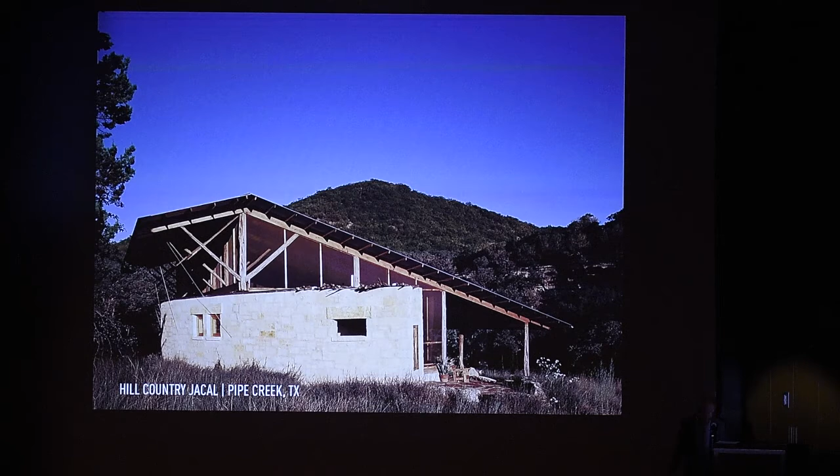And this is kind of a walkthrough of porches. I think porches are these beautiful man-made elements where you're out of doors. They're this fragile ecosystem that we make, a boundary between nature and the man-made.

Most recently, this beautiful house that Ted designed on Marble Falls. And then we started doing arboretums, buildings of the landscape in Naples and other places, each responding to sun and shade. And most recently, in Big Bend, this beautiful rusty thing that houses that beast, a dinosaur.

And this is the Quetzalcoatl, our original pterodactyl, native to Texas — kind of like the Dean, but the Dean's prettier.

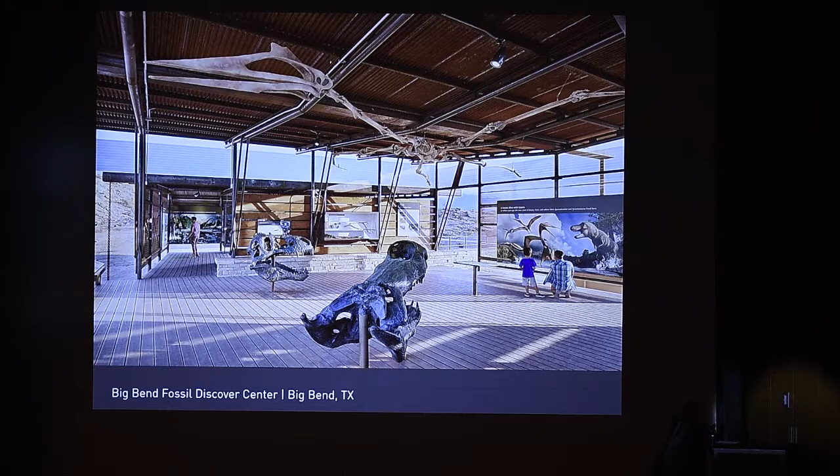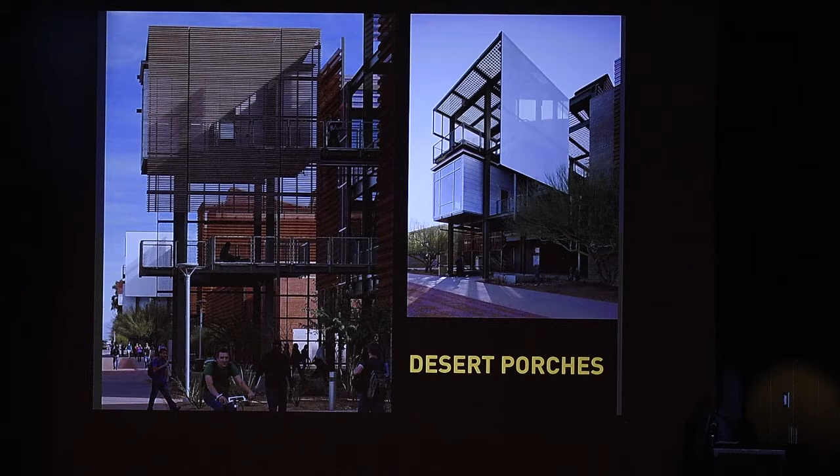Yeah, it's all open air, superstructure, all about being light on the land. This is ASU's campus, which we were lucky enough to work with Christy on, more PV array porches, getting a bit bigger scale, all porches.

Come on, that was pretty funny. My wife says I'm not supposed to say that. I'm supposed to laugh at all my jokes.

I'm going to start with a project in San Antonio on the river called Confluence Park. Bob Harris, my partner, and Tina Florian were the lead designers on this amazing job. This was about creating a visitor center on the San Antonio River that was all about engaging the place and talking about how water can be preserved.

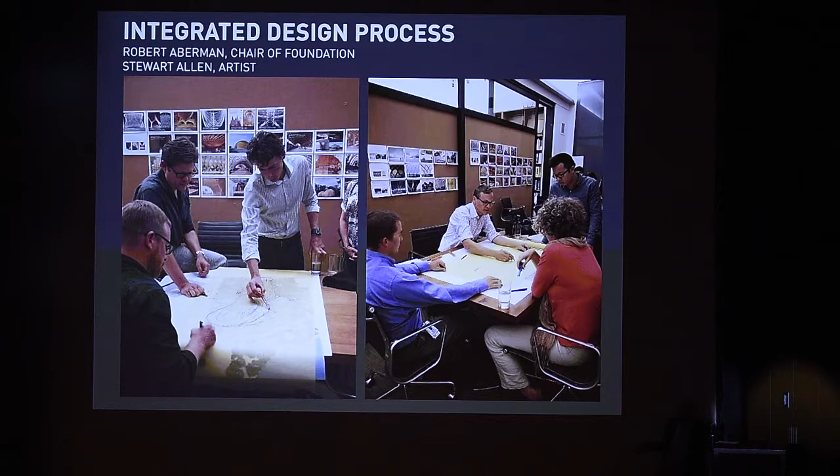We started, as we always do, with an integrated design charrette and made very significant aspirations about how the building should perform, how the owners, users, and visitors should engage the building. We begin this without any thought about what the building should look like. It's more about performance criteria.

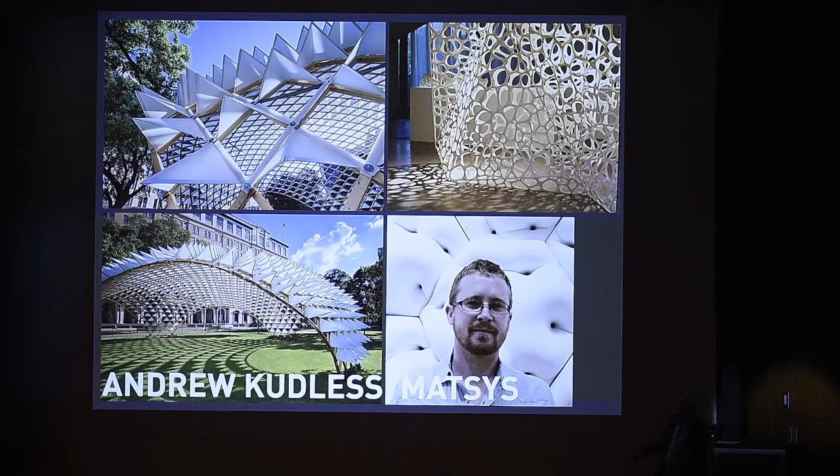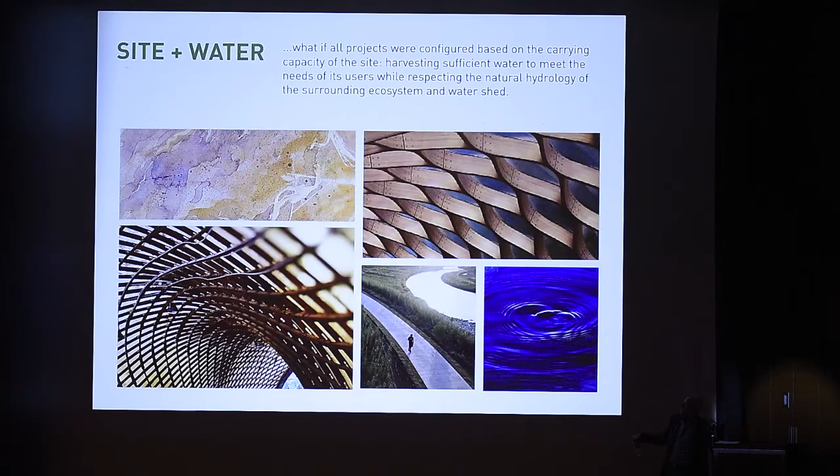We also had some amazing collaborations with Andrew Kudless, in this case with Matsys. We brought him in as kind of an artist, sculptor. He's an architect. He does these beautiful shaped forms, and he led us in a path we would never have gone in. Part of our journey when working with all these great consultants is to go on paths you can't anticipate. So, site, water, how does water shape the building?

This lovely idea about water and the umbrella, cascading off versus a funnel on the upper right. We decided to go with a funnel shape. Singing in the rain, toroidal shapes led to the first design, which is a steel structure as a tent with wood.

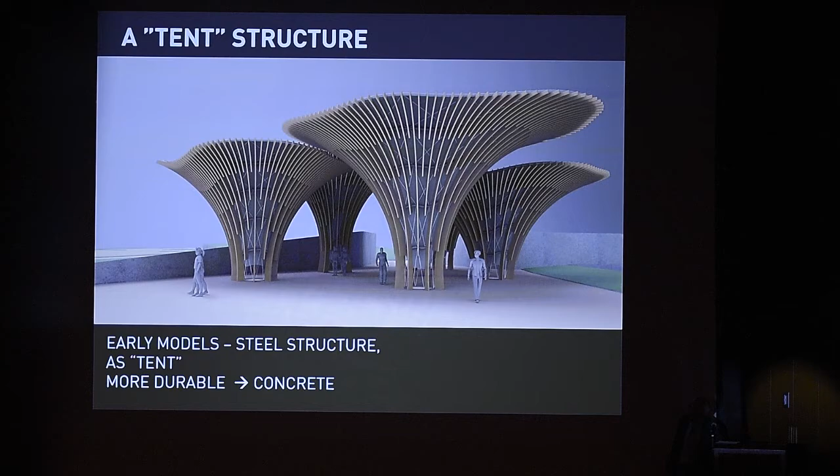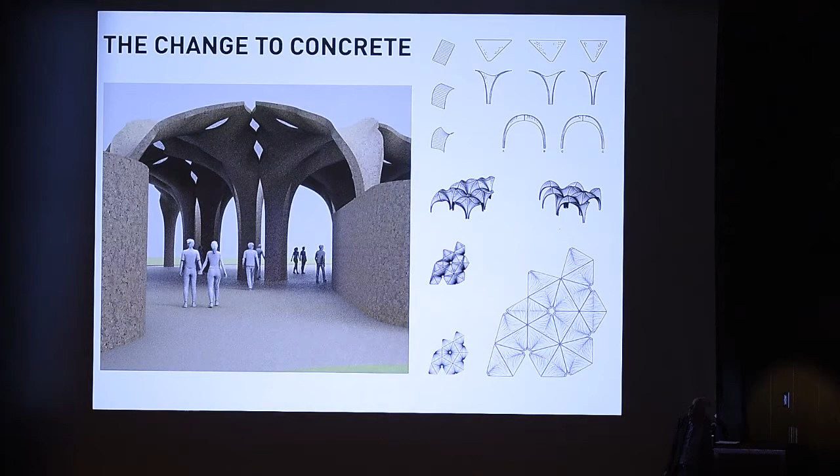We did a bunch of analysis. We found that we could do this more durably with concrete, longer lasting, and we began looking at shaping this. These are all forms being replicated. There's only 2 different forms, replicated in shape.

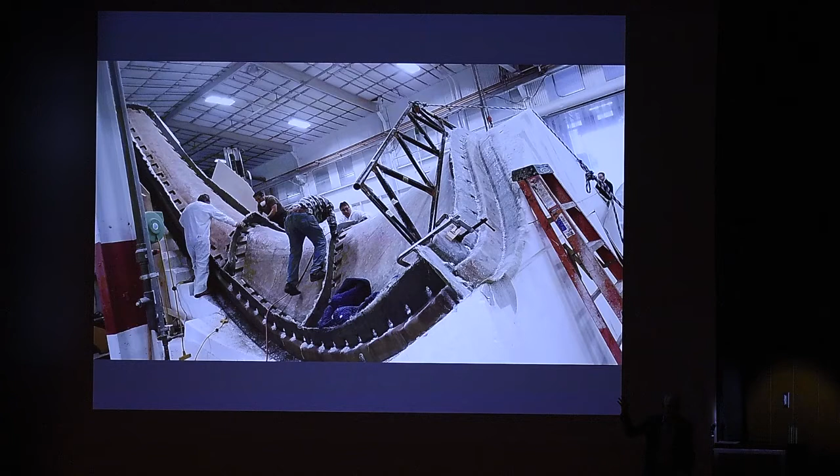So that was all shaped by a router, routed with a computer. The computer spit out this shape. The shape was fiberglass, and into that fiberglass shape were these concrete forms that then end up getting erected on site.

And that's kind of the wonderful character of the concrete, very rustic. It is what it is, and let it be what it is. Now the petals are going up as we speak.

So you can see how the funnel shape, the water cascades from the front down, and these are collection points. Each of the legs goes into a cistern. It keeps every bit of water that falls on the site in the site.

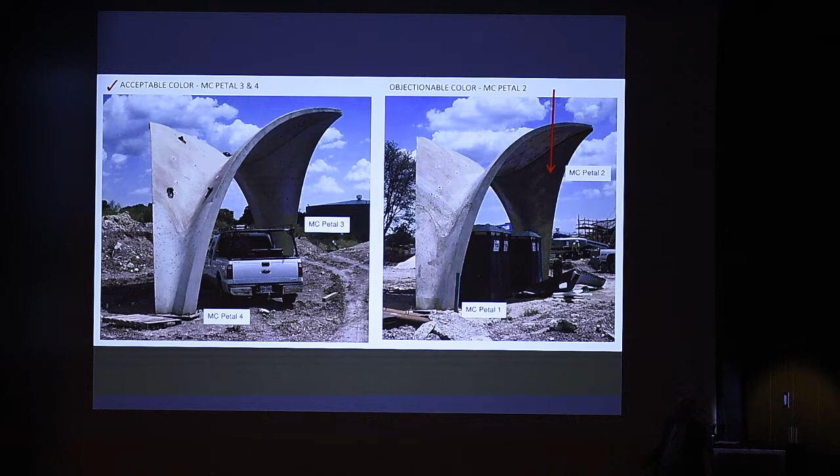Every toilet is flushed with water. All the showers for bicyclists are flushed with rainwater. All the irrigation is done with rainwater. There is no rainwater brought from off the site. It's effectively a net zero water project.

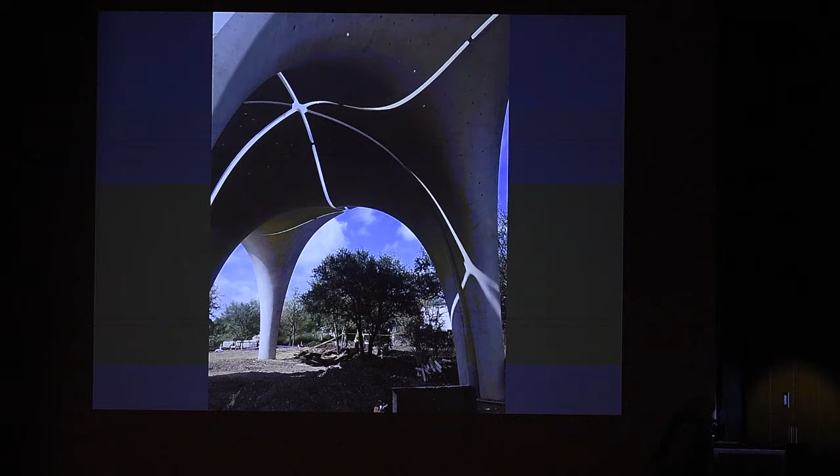Here's the form going up with the holes in the forms for daylight to stream through. And then there it is erected. It should be finished in 4 months, and that's what it's supposed to look like.

And this is what it's like when it's raining. So Confluence Park is really shaped by water. It began as a water element. It was all about how we worked with biohabitats, a lot of different designers, to craft a special rainwater harvesting porch.

The Witte Museum, we've been working with the Witte Museum for 25 years. It's our longest client, I guess they are the most patient. 25 years is a long time. We've done 7 different master plans, but we started with Brackenridge Park, and if you ever go to San Antonio, you need to go to the Sunken Gardens and see these incredible WPA projects that continue to inspire us for their craft and their beauty of just regional materials.

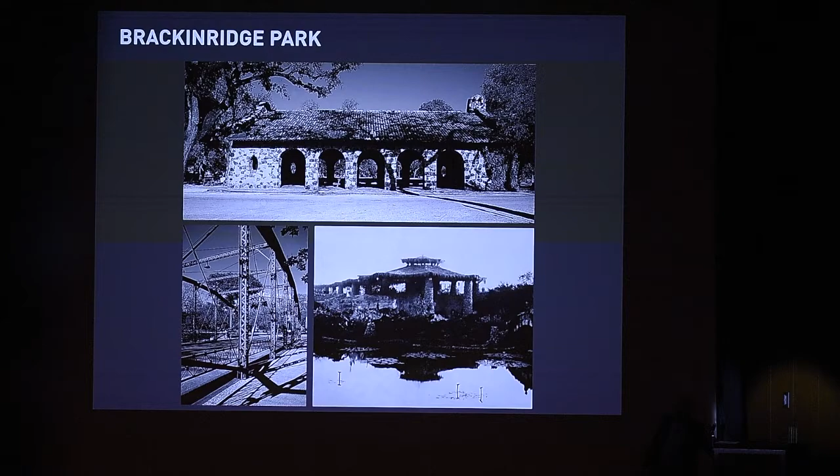That inspired us to integrate, this is the 4th generation concrete sculptor, and there he is sculpting on the left, and this is the entranceway into the new Witte for the children's entry garden.

WPA is evident all over the site. So when we were starting this fourth phase of the Witte, we were working with Gallagher and Associates, a really fine exhibit designer in DC and New York, and we decided the building should be part of the exhibits, and the building should speak to history and to place and to experience.

So we said, well, we think dinosaurs should romp all over the facade. These are actual dinosaur footprints that were cast by the paleontologist, sand cast, and then we cast them into concrete, and you can see the shape, the size, the scale of that dinosaur footprint. This happens to be a T-Rex footprint, and then you can see the byproduct of it in the stone itself.

And yet, oh my gosh, another porch. This is actually a lab for junior high kids to engage with environment and to do all kinds of science exhibits. There is a tree coming out of that porch, a cypress, actually. If you go back, that trunk right there on the left is a 180-year-old cypress tree.

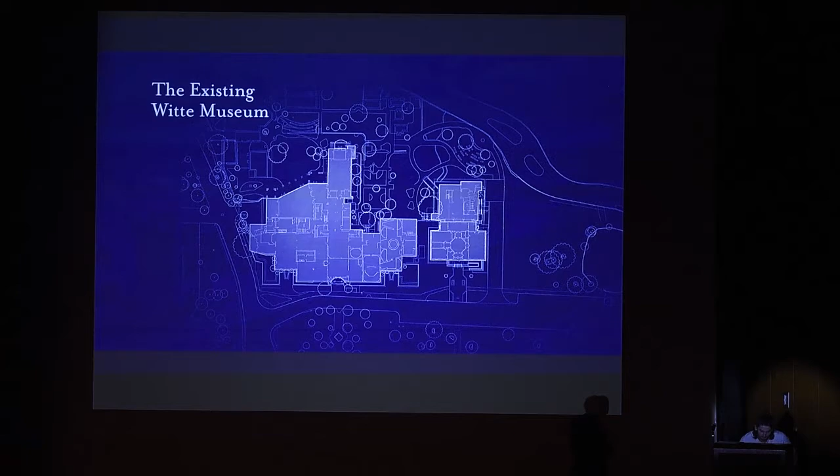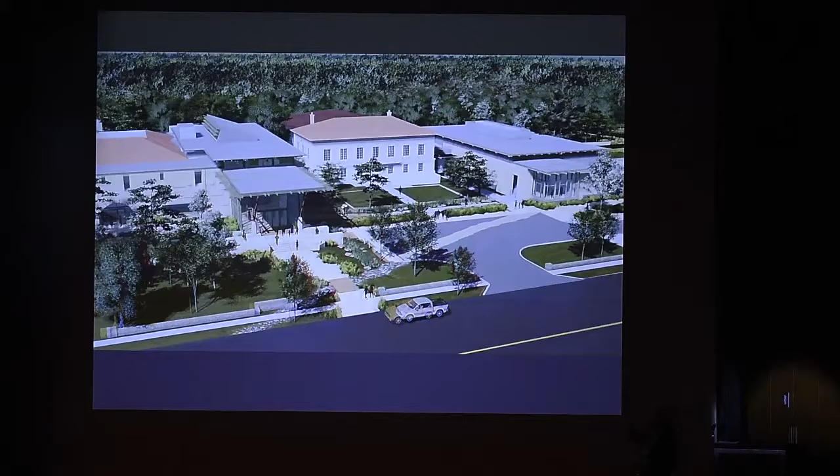So this is actually going to take you on a journey. This is an early video that we showed the Witte, and you're flying over the building. This is the new Witte in the middle. That's the old Pioneer building with the red tile roof. You're flying over the event center on the right. There's the entrance with the school buses for the school kids, and on the far right, the San Antonio River.

This is before, and that's after. That is the image of the building. We've got water cascading on the left. The building, the walls itself are out of old yellow limestone, so the building talks about weathered stone, brick, the history of building materials.

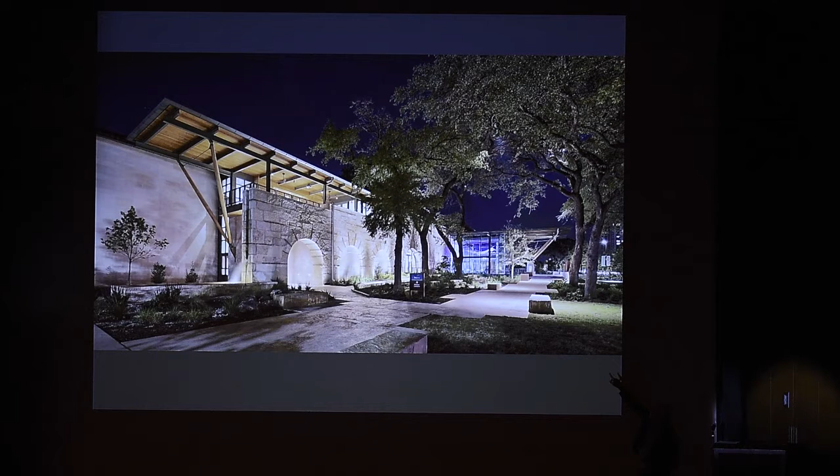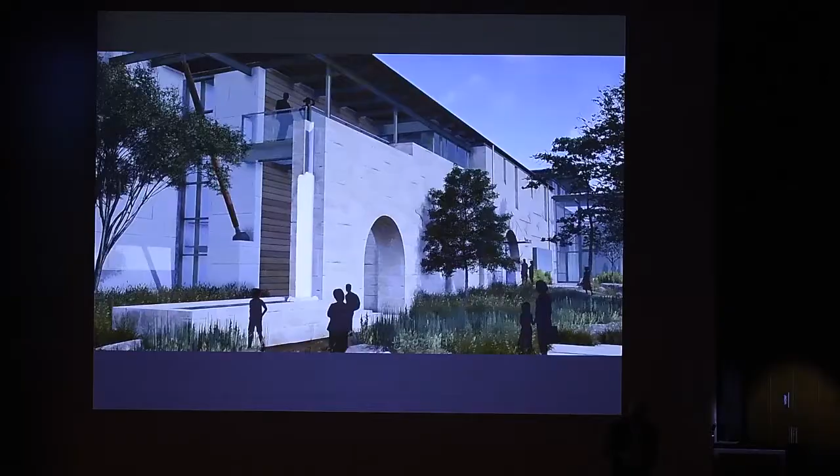Another image showing the very front door on the right, and you can see the flying pterodactyl in the middle. So this is Discovery Walk. So as you're moving up from the garage to the front door, you're discovering history, deep Texas time, and off we go.

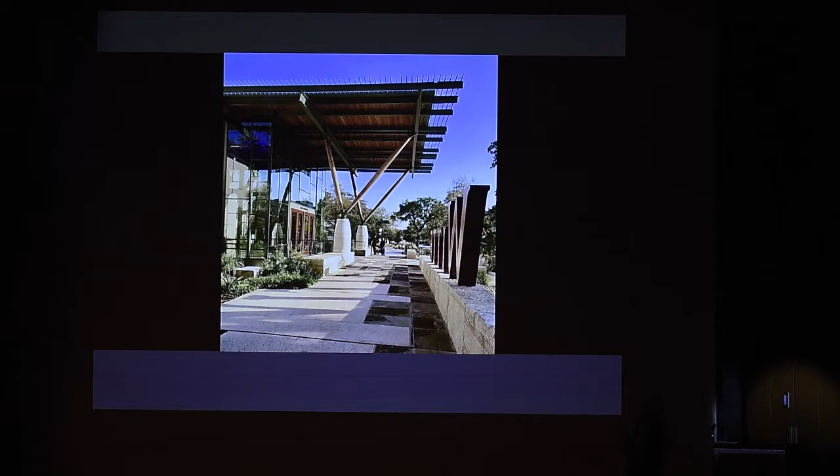So we often use these tools to especially talk to specific issues about experience. That's the front door portal. You gotta like movies, because I don't have to say anything.

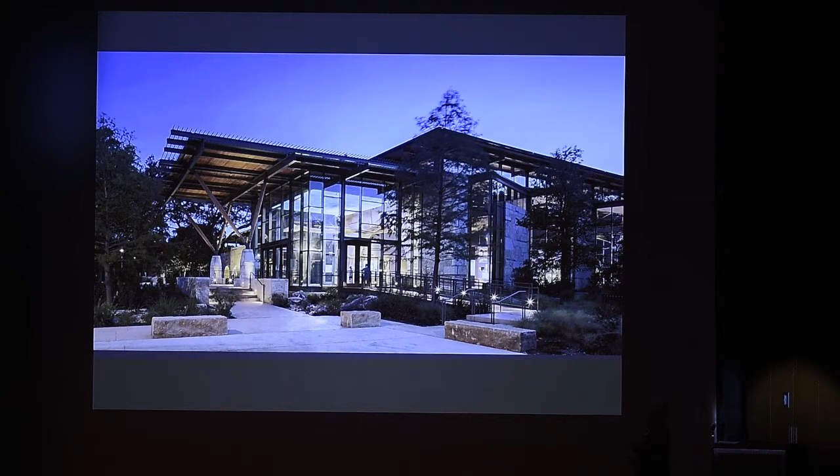This is a rain garden. Every bit of water that falls on the Witte cascades and is caught by bioswales before it goes back into the river. There are the pterodactyls overhead.

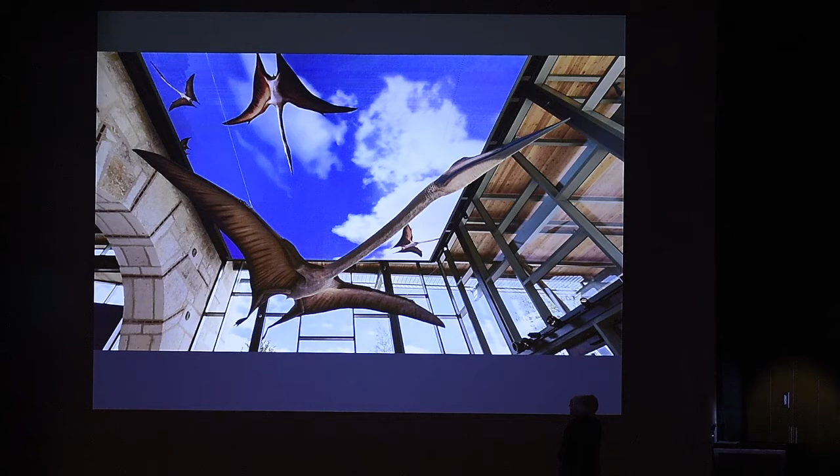The archway, you come into the building through a great arch. The old Witte had three Romanesque arches, so we thought, well, we'll just do one big 26-foot arch. And there's the pterodactyl with the video above it. So the front door is actually, as you're waiting for your ticket, you're flying with the Quetzalcoatlus.

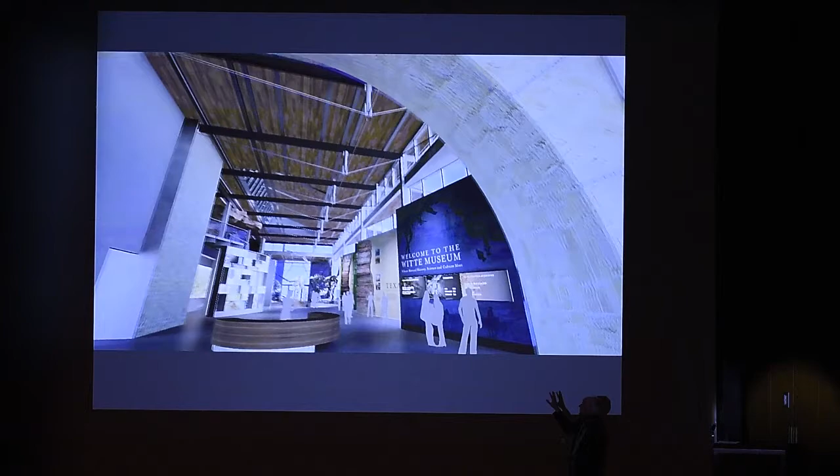As you go through the arch, you go into deep Texas time on the right. We always love road cuts because they talk about the history of the orogeny of Texas and the thousands of years, hundreds of years, millions of years, and that becomes the wall panels that are the exhibit of the building. And as you move around, you're looking towards the backyard, towards the river.

And the dinosaur exhibit is toward the rear. Lots of light. Unlike other museums, the great thing about working with a science museum is it's not light sensitive. All the fossils are actually cast polymer fossils, so they can take lots of light.

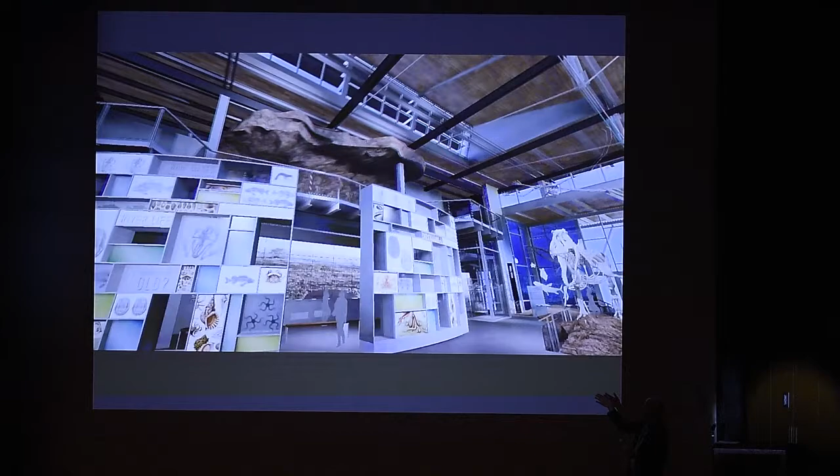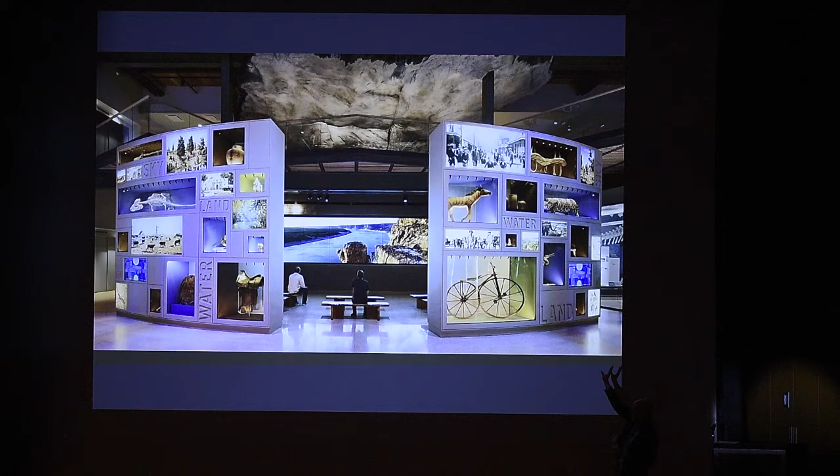Now we're rotating and looking into the orientation theater in the lower half. Up above is actually the Pecos sandstone overhang. So you understand kind of deep Texas time orientation of the entire museum, and eventually we'll move up to that limestone grotto above us. So it's a way of thinking about working with Gallagher and Associates and having the exhibit be integral to the building experience.

So now we're in the Dino Hall. As we move out to the backyard, the glass, which faces southwest, is actually coated with imagery, knocks down the sun. We rotate back around and look back towards the Great Arch, and that's the finished project.

There's lots of technology embedded throughout these elements.

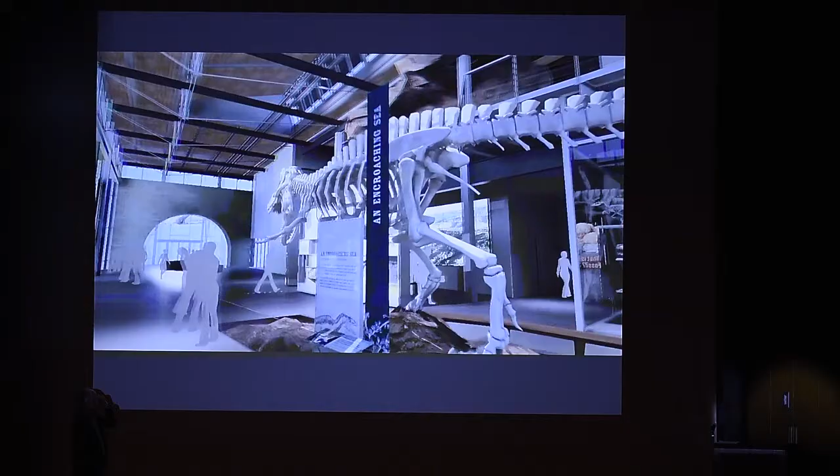And we do have an encroaching sea, no question. Looking back towards the backyard and the river.

And then at night, so a very different character at night, with lots of interesting theatrical lighting we had to achieve during the day versus the night.

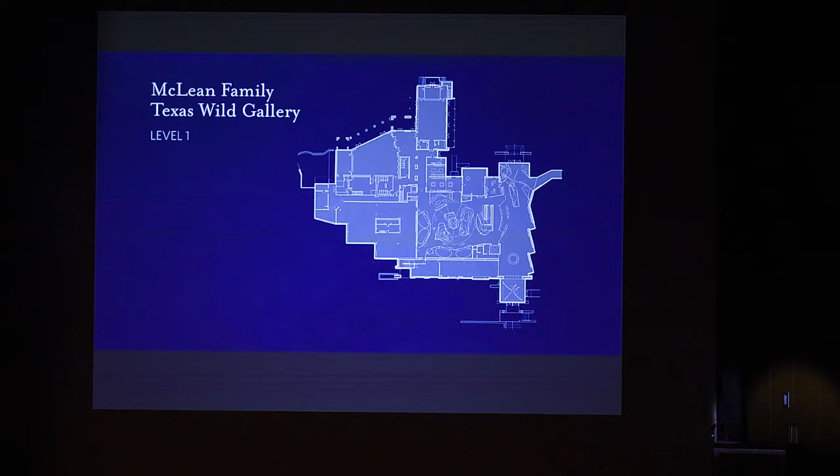So the Texas Wild Gallery is the old part of the museum that we had to repurpose with dioramas. You move through the old dioramas that have been restored, past the bison, and look up to the Texas sky, which is changing, and there's a thunderstorm that happens.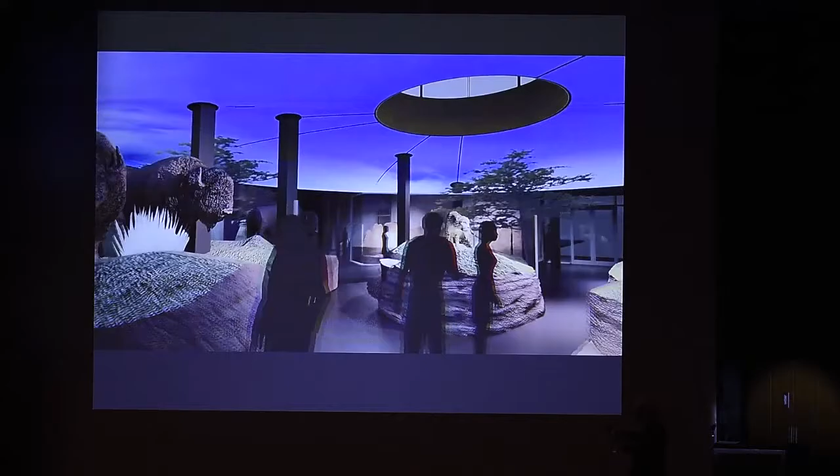And how also to make a lot of these exhibits so you don't feel roped off. You feel encouraged to engage the tactile nature of the exhibits.

And then you can see the water on the left and the croc. And then we're going to go upstairs to the rock shelter overhang of the Pecos.

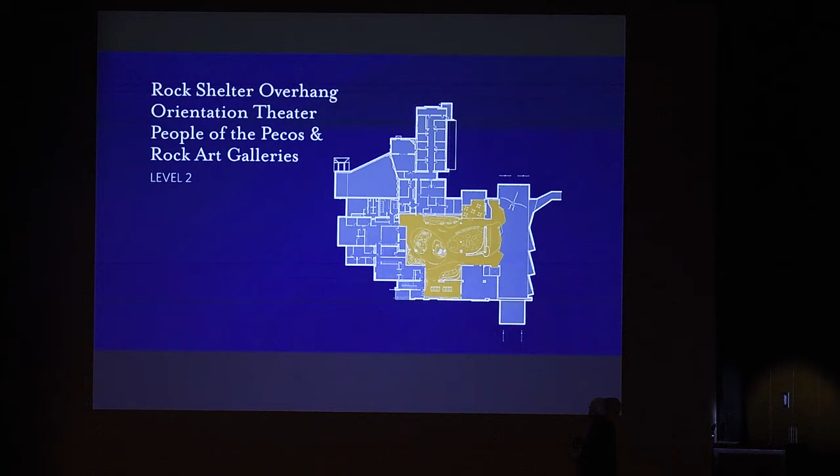So the Pecos culture in far west Texas, you go past the overhang, the entrance is to the left, and you go into the orientation theater for Pecos.

So the Pecos culture, these incredible pictographs are 8,000 years old.

They're actually, the Witte Museum is the major entity that takes care of the entire Pecos culture in terms of all the rock shelters.

So we worked with these incredible fabricators from San Diego who built all this faux limestone rock and gravel, converting a very mundane second floor experience into this very hands-on interactive, both technologically as well as visually interactive space.

All the pictographs are actually projected onto the fabric of the stone, and so you can rotate through the different major caves of the Pecos culture.

And that's actually a photograph, not a rendering.

So from the overhang, you're looking out to the river, past the Quetzalcoatlus and the exhibits. The sun slides through the space, and you're looking towards the arch on the front door of the great opening.

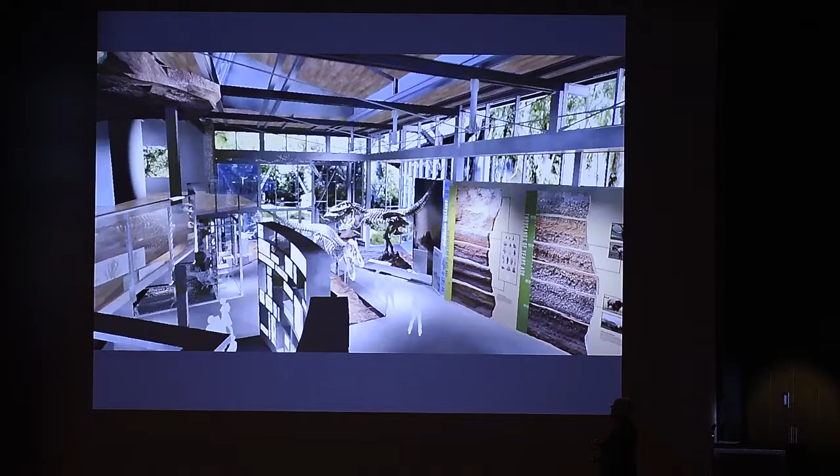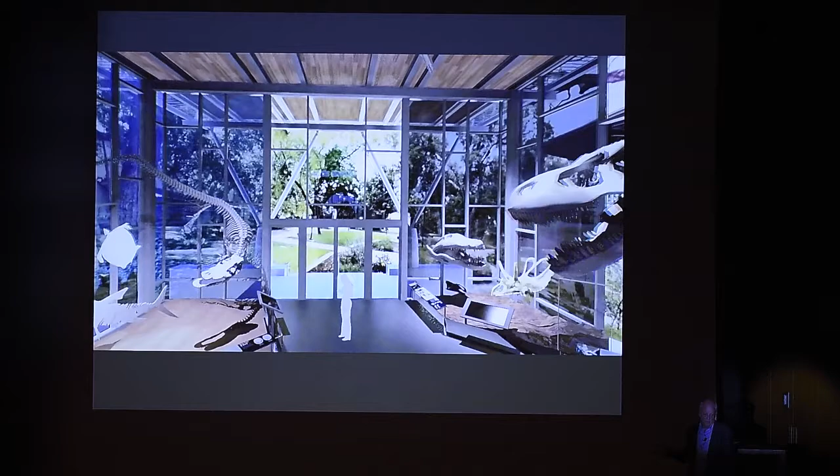And then we go back down again. So this was really helpful to the Witte, to be able to show how the building engaged exhibits, how exhibits were intrinsically part of the experience, and how they could fundraise for the building. They had to raise over $100 million, which is not an easy task in San Antonio, Texas.

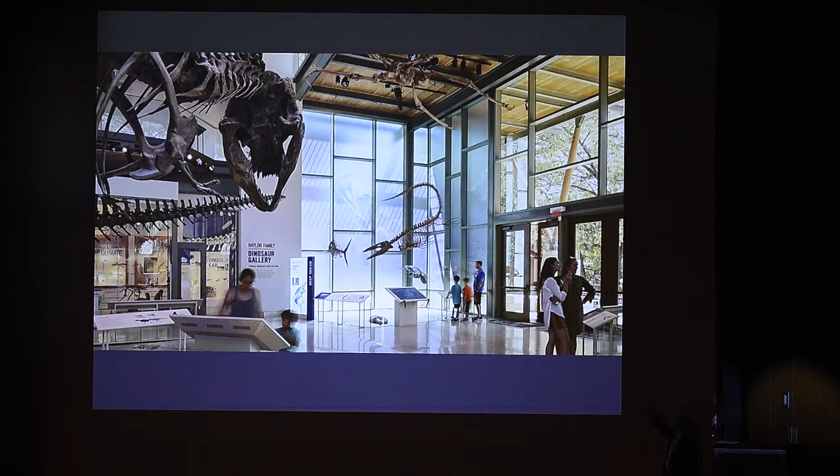And there's another before, looking through the windows, showing how the windows become the exhibits. And the one I really love is the next one, which shows the deep forest green of the Cretaceous area when you're looking out towards the river, but you're engaged with these exhibits.

So this tool was really helpful to the museum, not only for fundraising, but for the exhibits, staff, and curators to really understand how the project worked.

So the next building is the third building, and then after that, we'll do a quick urban design segment. But the library just opened.

It's been a journey, like every project. It's involved quite a few consultants, and we always imagined the library as a portal not only to knowledge, but also to the environment, and that the two were intrinsically linked.

And having grown up in Austin, as a citizen, we've never had our own living room. We've never had our own kind of public space to call our own, to be engaged in landscape and also engaged in a man-made environment that was very much sympathetic to the landscape.

So I'm tired of talking. So Jonathan...

Smith is going to come up here and walk through. So Jonathan's an associate partner. How many years did you work on this project?

I've been working on the library for roughly the last 11,000 hours of my career. So longer than I was, not that I'm counting. Okay, with that, I'm sitting down. Longer than I was sitting in the seats here getting my B.Arch from UT.

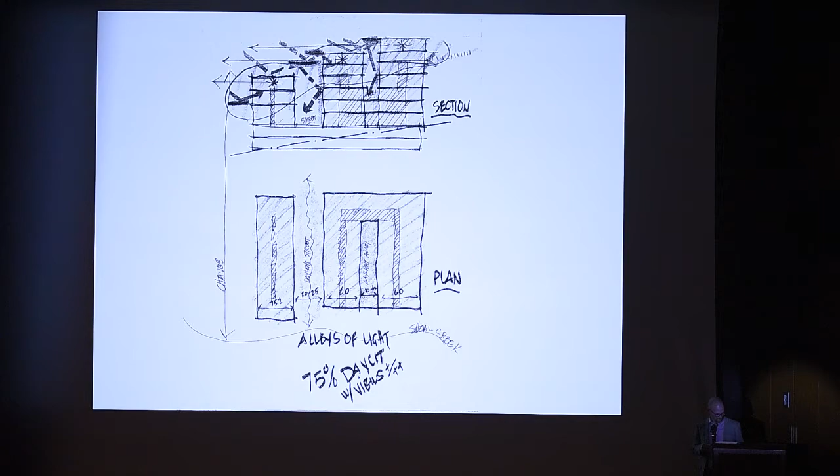We did this in two ways, analog and digital. One of the most helpful things we did on the entire job, and you're going to see a theme of workshops, was another 2-day workshop with all the stakeholders who could impact the daylighting: the daylighting designer, the artificial lighting designer, the interiors, and the architects. We were joint ventured with Shepley Bulfinch on this project. So for all you students out there, here's a quick how-to so you can go home tonight and do your own daylighting workshop or charrette with your daylighting designers.

Step one is build a 1/4-inch scale model of your space. In our space it was an atrium, 6 floors, so it's a fairly large model. We called it a dollhouse model because the colors on all the walls and different spaces within the building need to be fairly accurate. You can't build it out of black foam core and have it perform the same.

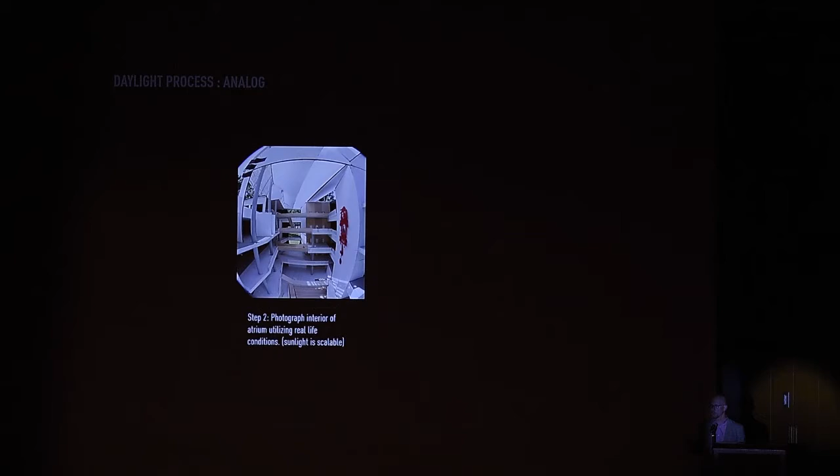Next, you choose a vantage point within the model and start taking photos. We used this not only as a daylighting tool but also as a really important design tool. This moved the bridges and the stairs around within the atrium just by using that model.

Step 3 is getting a fancy luminance mapping so you can really understand where the daylighting is coming from. Here you can see that sort of lightsaber thing in the middle -- there is our central skylight that's doing the bulk of the work here.

Step 4, like anything in design, is iterating over again. Gus there on the left in the blue shirt and I spent a large portion of the night between the 2 days of the daylighting workshop rebuilding a different roof for the building and testing it out the next day. We learned a lot from that -- just a few quick things that made it through that we wouldn't have known about had we not had that daylighting workshop.

One was basically the guardrails around the atrium and how hugely important those were to daylighting. We originally had those as clear glass and they got changed to an opaque white. The other big one is on the north side of the atrium, there are 2 large south-facing walls. We had thought originally those walls might end up being green walls, but when we put our little piece of green felt in the daylighting model, it sucked out almost all the light. So they ended up being these really bright white panels to really harvest the daylight in the space.

Along with the analog was also the digital. We worked really closely with the Integrated Design Lab out of Seattle. They were our daylighting consultants, and we ran through all the paces in digital models as well, trying to tune and hone and work through different options.

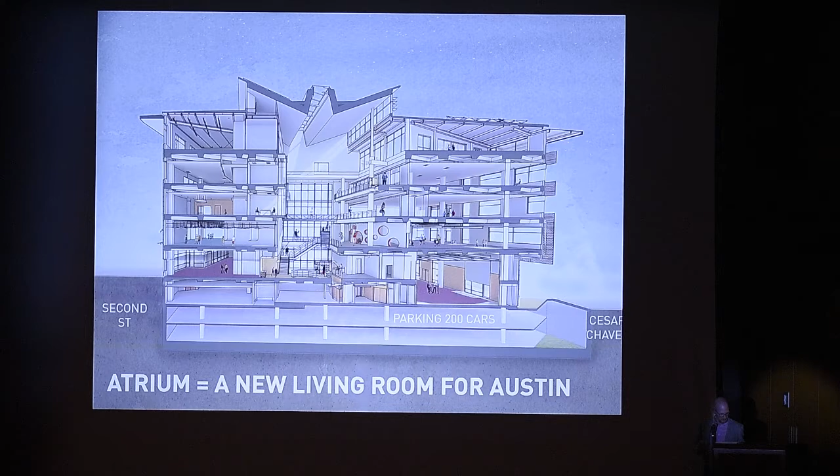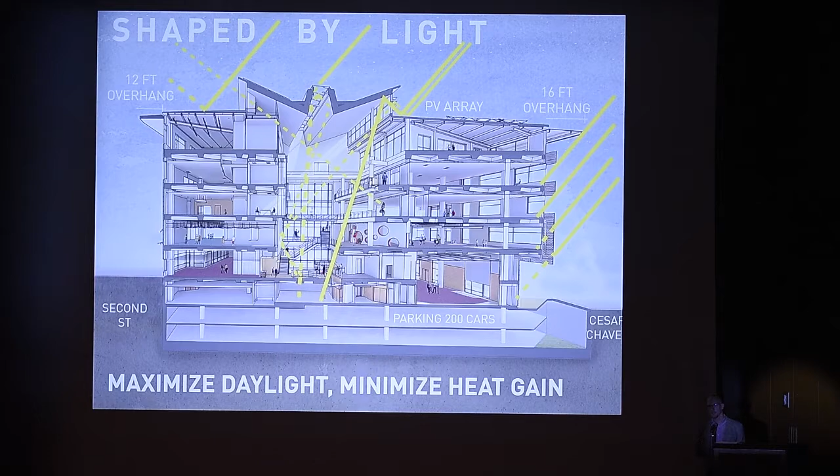So if you went to the library this past weekend, here's what it looks like with the atrium there in the middle. You can get a rough sense here about how we were using that center space to really bounce light around and off of those guardrails I was mentioning, and bring it into the space. So as well as the 5th facade on the roof, the other 4 facades were super important as well.

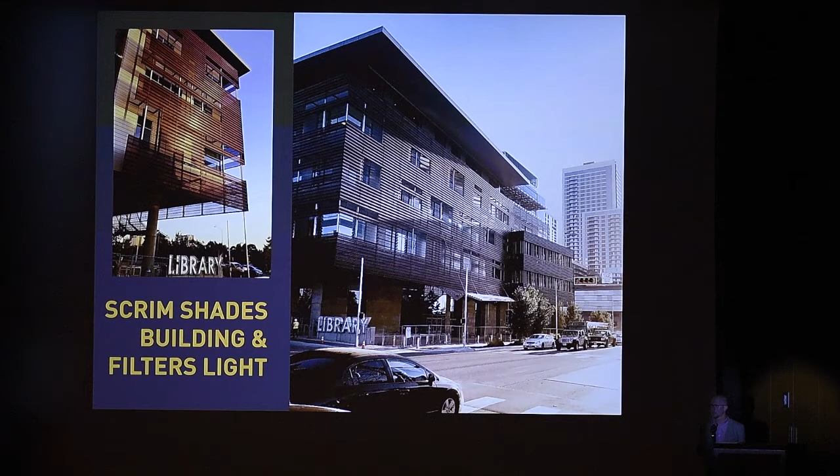We really wanted to fine-tune those to continue to make this the best daylit library in the country. We did that in a similar fashion, where everything from the floor-to-floor height to the aspect ratio, the sill height, the scrim, the perforation, and the color of the scrim was studied and worked through. We ended up with a 50% opacity on those screens on the exterior of the building to shade the glass and the exterior, but also bring in enough daylight for everybody.

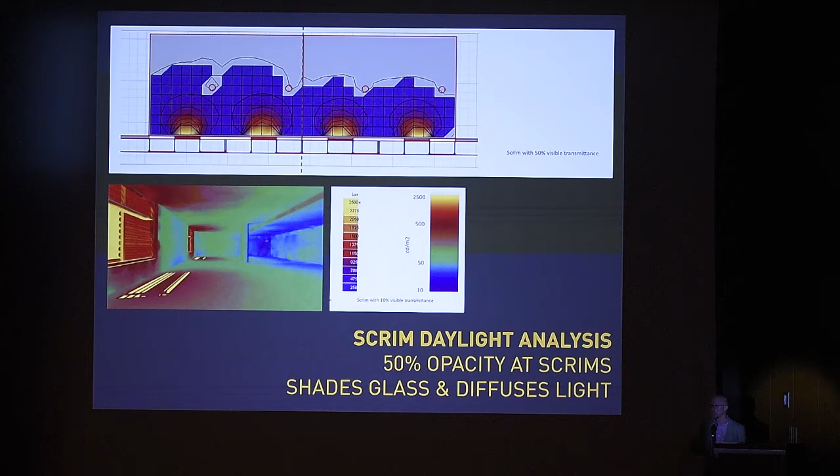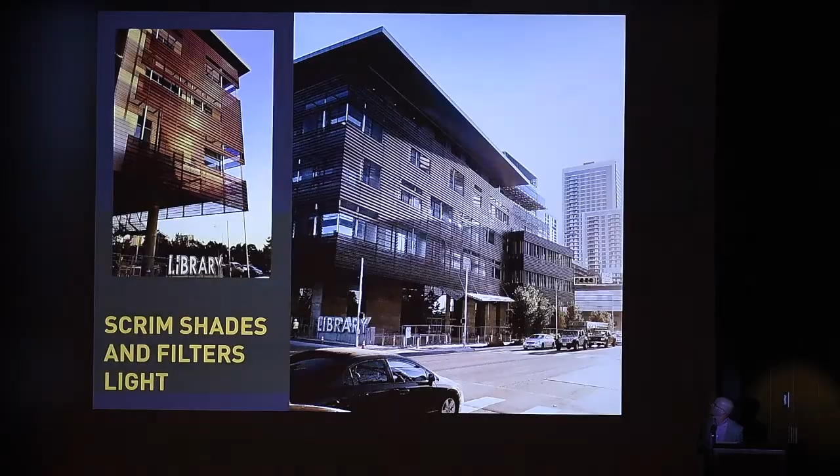Let's see here, I've got some extra slides in here. There we go. So this continued all the way through construction—this didn't just end at design.

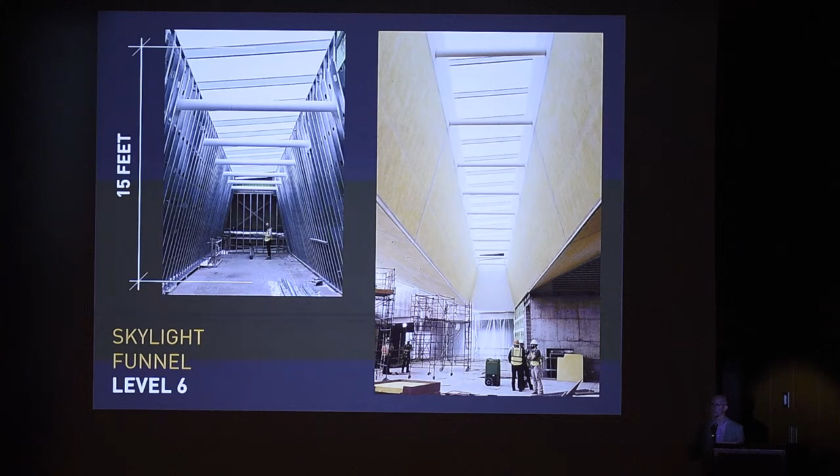On the slide there on the left is my co-conspirator Daniel Lazarin with a light meter, and we are standing on scaffolding 6.5 stories in the air, measuring the light on the underside of the very top of the skylight, which when you're in the library doesn't look like it's 15 feet tall, but it's a fairly large space. We really wanted to test and verify as we were moving down the building—as they were pulling the scaffolding out, we were constantly climbing up on it and taking daylight measurements.

This is the day where I could start sleeping at night. I showed up this Tuesday morning and climbed up the scaffolding—the contractor called this the dance floor. So we're hanging out on the dance floor and looked up, and you could see just the steel studs and how much light was grazing off them and bouncing into the space. I got really excited.

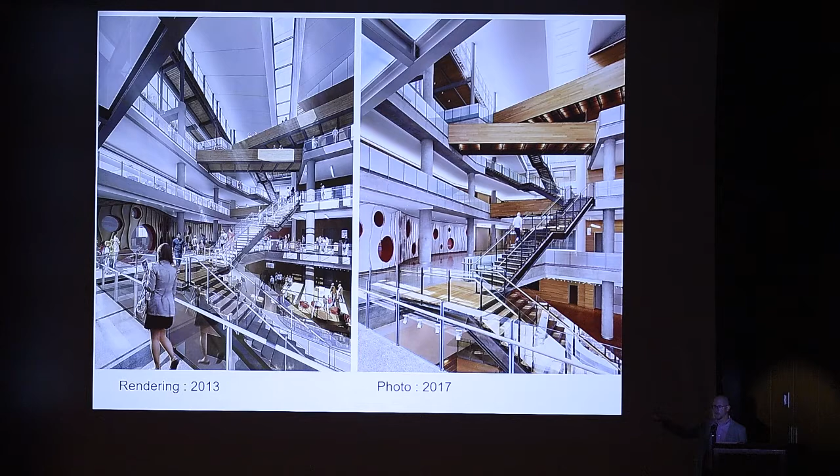On the left is the rendering that we produced at the end of construction documents for City Council, and on the right is an image from a couple of months ago. Now that image on the right is full of happy, smiling children and people running up and down the stairs, but you can get a sense for the space.

The other thing about the right-hand image: this summer I really felt like we had gotten over the finish line when I was in the atrium doing a punch list, and I could feel a cloud go overhead. It was really awesome—there are not many buildings where you are that in touch with what's going on outside.

So to come full circle, what started as setting measurable goals during the integrated design charrette workshop really ended with actually going through and measuring those goals. This is where we are to date: we're tracking LEED Platinum, and you saw that first slide written in pen was 75%—we managed to crank that up to 80% of the regular occupied spaces.

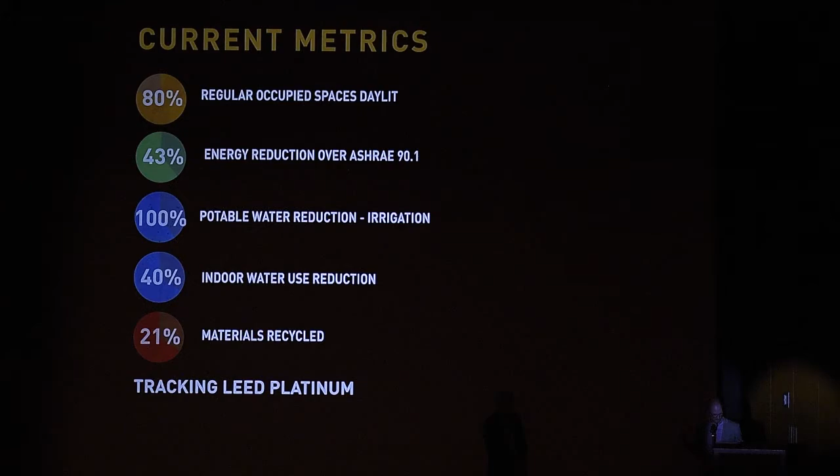Squiggly sketches. Owen Cappleman, 43 years ago, made me keep a sketchbook, and he didn't care what the sketches were of—I just had to do a sketch a day, as we all did if we were in Owen Cappleman's class. Today I'm at my 171st or 172nd sketchbook.

I think it's really important as students that you make that visceral connection from your brain, your head, to your hand, and have that capacity to draw in front of a client. It's still far more magical and far more compelling than getting in a computer and routing it through a computer, not being able to immediately make quick movements that are fluid and personal.

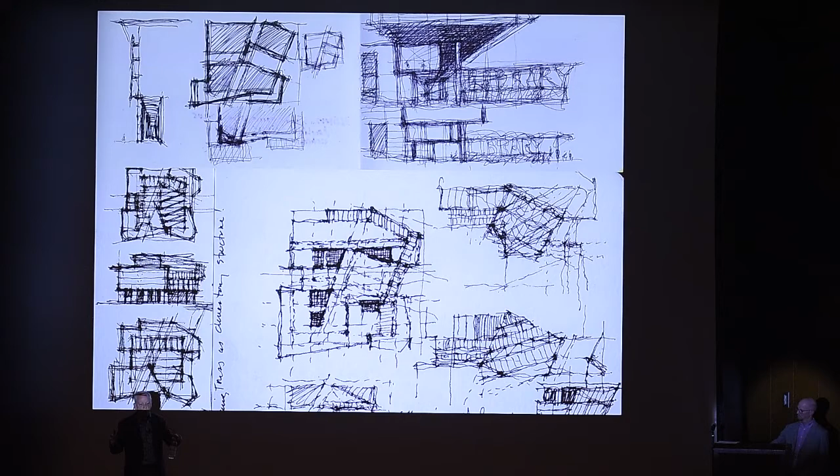I think the computer is an incredible tool—we've shown examples of how incredible a tool it can be—but I still think communicating is the most important tool an architect can have. Communicating ideas to the client, being able to have a conversation with users and everyone in the room, and being able to make quick sketches that then become digital is a really great tool.

So I'd really encourage everybody to get your pencils out. Put the computer away, even for just a day.

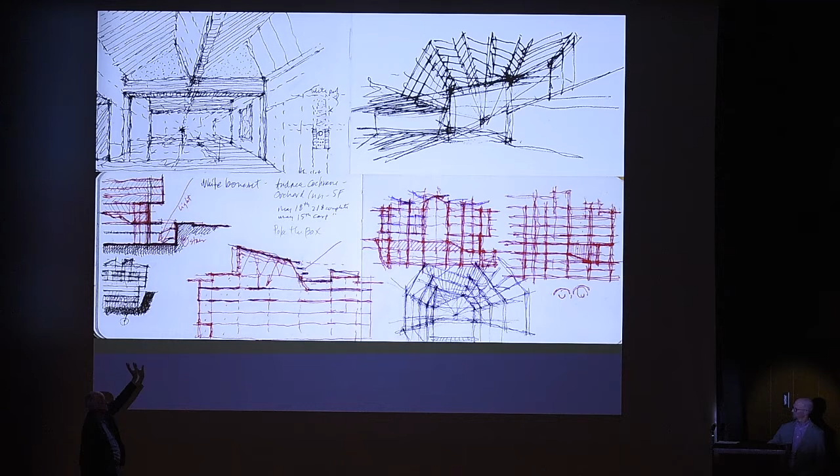Early sketches of the atrium, shaping of the atrium, testing these sketches against the daylighting models with funny clay blocks. The remarkable story is we made this clay model in about 20 minutes.

We showed it to the librarian, Brenda Branch, who retired this year. She's been in the library system of Austin for 30 years, trying to get a central library for 25 years. It was great to sit in front of Brenda with this clay model and show her this ridiculous model, and she got it. She said, oh, it's got a special roof. That's really what this model is—a special roof.

So the plan: the idea behind the library was to animate the cityscape, make the whole west end of 2nd more animated. There's a porch, a cafe that flows out to 2nd, on the bikeway, Shoal Creek. On the right, there's an entrance from the Shoal Creek Hike and Bike Trail. We convinced Brenda that we needed to have 3 entrances.

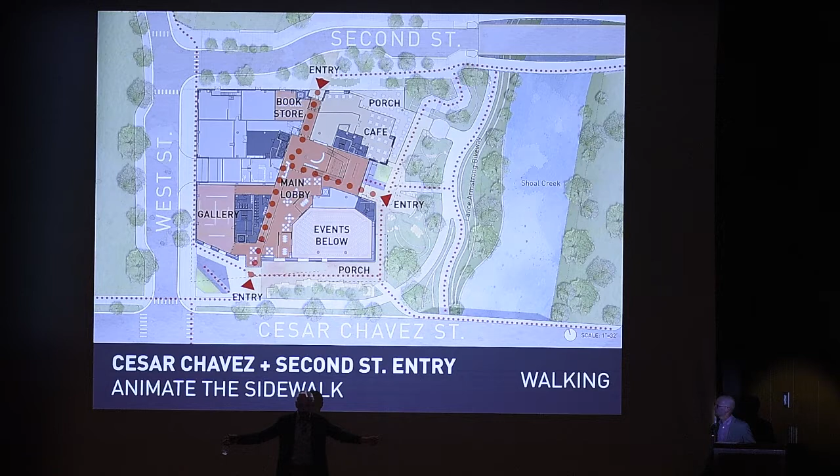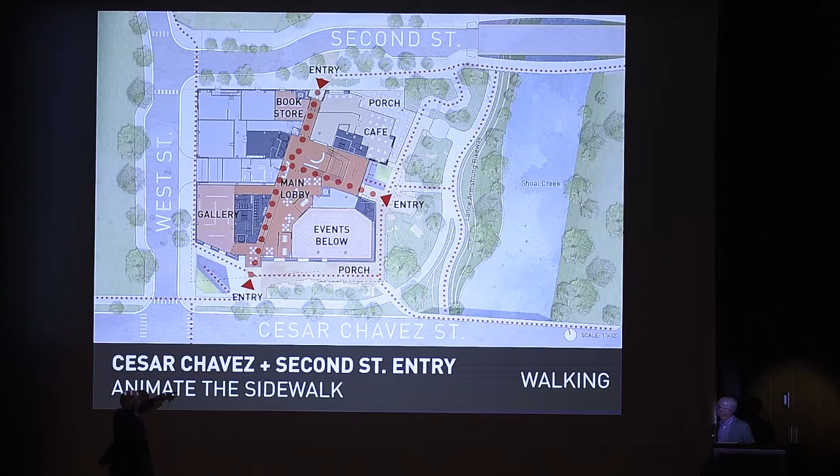One entrance is on Cesar Chavez. How many times has Cesar Chavez closed because of an event? Come on, any guesses? This is the interactive part where you're supposed to say 30%. Okay, that's right, 30%.

So we made an effort to have a huge event room that spills out to Cesar Chavez and also spills over to the Seaholm lawn. We imagined the book festival and other festivals like ACL using this event room, for music, cinema, readings, and an amphitheater that faces Shoal Creek—there was a chamber orchestra or quintet there Saturday.

Lots of people were sitting there looking out to Shoal Creek, so it's very connected. We imagine the atrium as more than just a light-giving element—we imagine it as a living room. In order to make it a living room, we had to scale the zones of a 6-story space down.

The Shoal Creek Amphitheater is a double-height space looking out to Shoal Creek. The children's and teens wing, the red oval, is at the mid-level of the library, and the top is the daylit atrium penthouse level, which is the rooftop garden and reading porch. Those zones, along with the wooden bridges and stairs, help scale the atrium down.

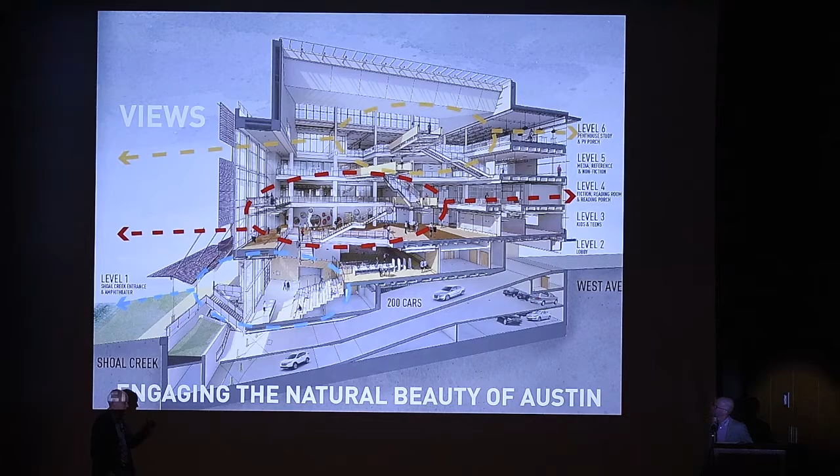One of the major challenges behind making the atrium a living room is the acoustics. This is actually pretty dead in here—if you go in the library and clap your hands, it's a fairly acoustically dead space.

We achieved that—actually, the entire ceiling of the atrium is acoustic plaster. It's absorbing sound, not reflecting it, but it is bouncing light. And then there's a perforated metal wall panel with a highly acoustic attenuation panel behind it. So 2 of the major surfaces in that atrium are absorbing sound—it's not bouncing off more than 2 walls.

We tried to keep everything out of the top of the skylight, which is really, really important. So the only piece of infrastructure that spans across that skylight are those large steel tubes at the very, very top, and the mullions that directly align with them. We had to work really hard to get rid of all the cross bracing.

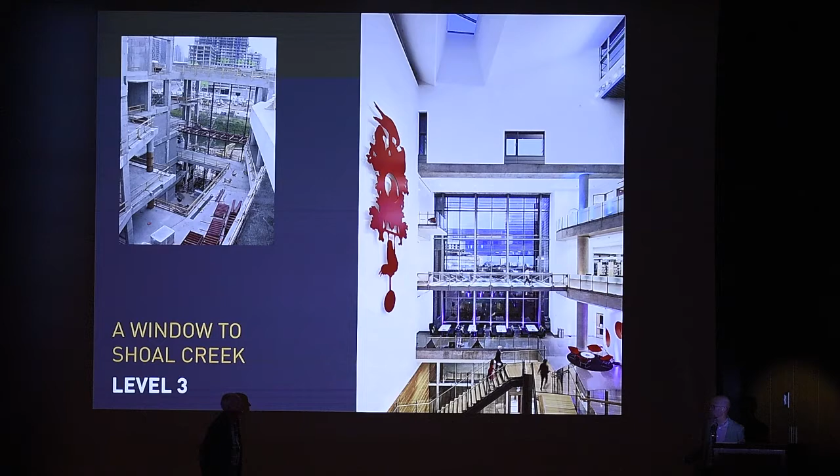At level 3, the children's wing, there are circular openings you can sit in, and kids were sitting in all those round openings. It was pretty fun—we got carried away with circles.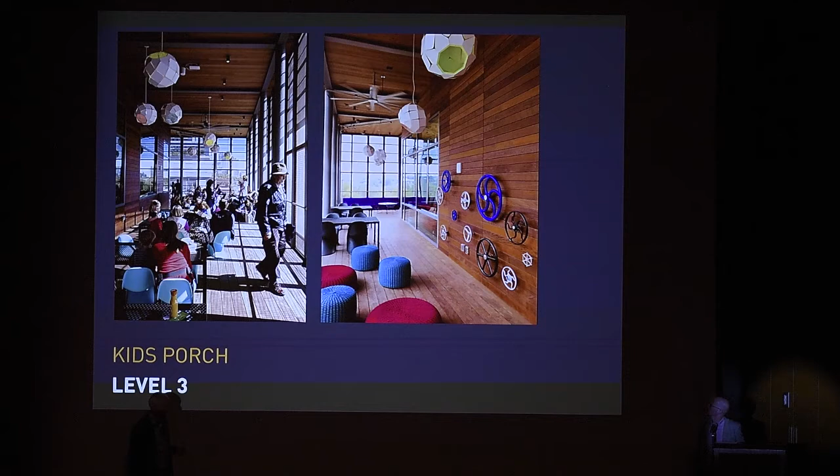And this kind of staggered movement of stairs and bridges - there's a method to the madness. When we were doing the daylighting model, we noticed that when you stack the stairs or bridges, they created a huge dark zone from the skylight above.

So by staggering everything, it actually made the light more dispersed as it moved down five floors. Similarly with the lighting under the bridges, that all came out of the daylighting charrette. They were well daylit under the bridges, but your perception was they were darker.

So we added those LED strips during CDs. The 3rd level is really about the children's and teens. The 4th level is where you really start to see a library - there are stacks, there's this great reading porch, and then there's a more sort of buttoned-up reading room.

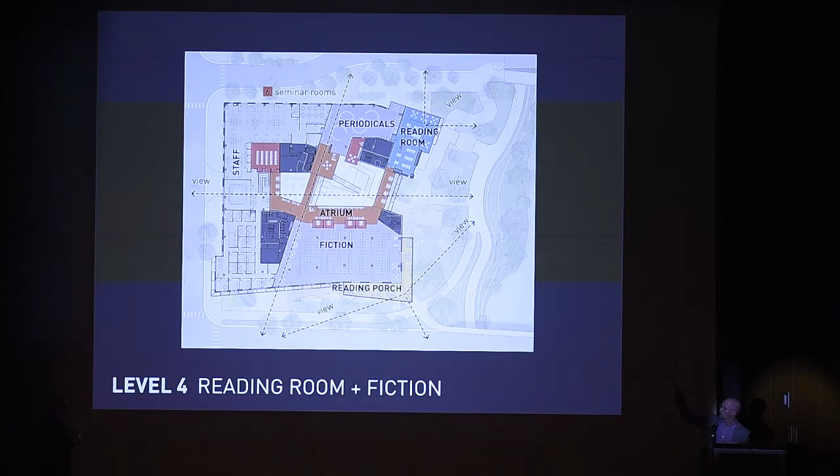This is that space, a sort of great civic reading room, and you can check this out for events. There's a great tradition within libraries of quotes about reading and knowledge and books being carved into them or put on them, and we wanted to continue that tradition. We did it in a slightly different way.

We water-jetted 3/8-inch plate aluminum and then got it anodized. We worked really closely with the subcontractor on this, Kovac, to get this worked out, and it turned out really great. You get these great shadows in the morning when the sun is coming in, and you can just stand here all day and read this.

It's also becoming a big deal in selfies - lots of selfies being taken in front of this.

Then there's the children's porch on the 3rd level, and then we unfortunately call this one the adult porch on the 4th level. But it's also a great outdoor civic space. It's got incredible light - we perched it right at the corner of Shoal Creek and Lady Bird Lake, on the southwest corner of the building to really catch the breezes. Even on the really hot days during the summer when it was under construction, it was still relatively comfortable out there.

Throughout the building, but this one is on the 4th level, are these shared learning rooms. Libraries are no longer a warehouse for books - they're a civic space and a space for people to start businesses, a place for people to meet. So throughout the building there are technology-rich conference rooms that people can check out just like a book and use.

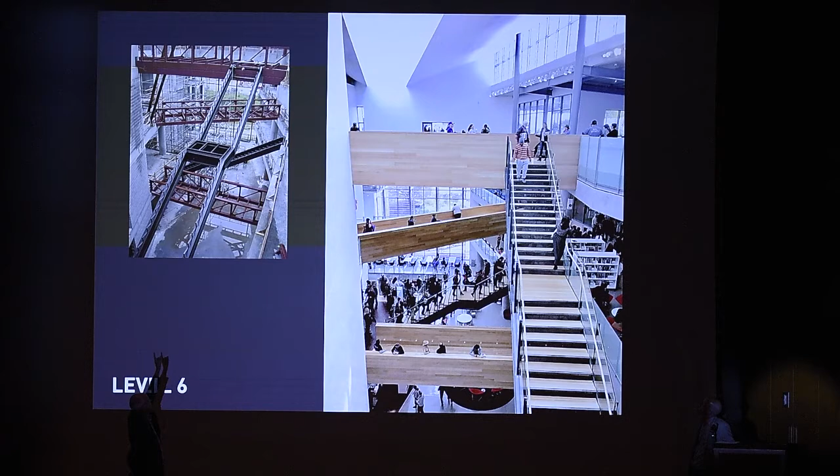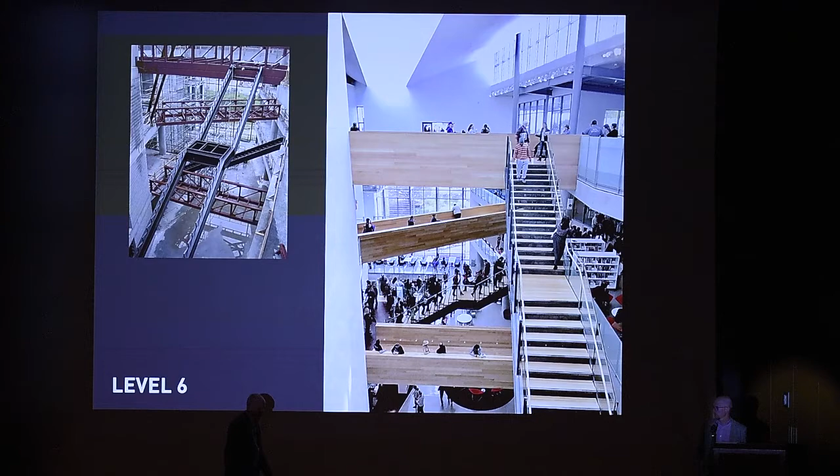So up on the roof, the 6th floor penthouse roof - on the left, before and after, how the superstructure works, the steel girdered bridges, which then became wood. There was a lot of conversation about the nature of the bridges and acrophobic people, so we raised the wood up and made them opaque so people could walk on these bridges without worrying about height. We also worked with a structural engineer to make sure they weren't bouncy.

Butterfly garden, so the lacy oak on top - the superstructure carries about 5.5 feet of earth over styrofoam, over waterproofing. We've had butterflies up there already. And then the PV porch.

It was great on Saturday to see these families up there reading already. On this porch, finally Austin has a place where you can go and see the expanse of our incredible Lady Bird Lake, Shoal Creek, downtown, with views in 360 degrees, with 180 kilowatts of energy being produced above them.

And then there it is from Auditorium Shores looking back, kind of the library as a welcoming lantern. We've got another video - not done yet.

This is a video of opening day, which was one of the greatest days of my career, to see this building open. This is the view from the penthouse level looking back to the clerestories, to the rooftop, and this is from Shoal Creek, which is at my back. I'm looking up into the atrium and seeing the skylight on the right that Jonathan talked about, that's 15 feet deep, and the lightweight trusses.

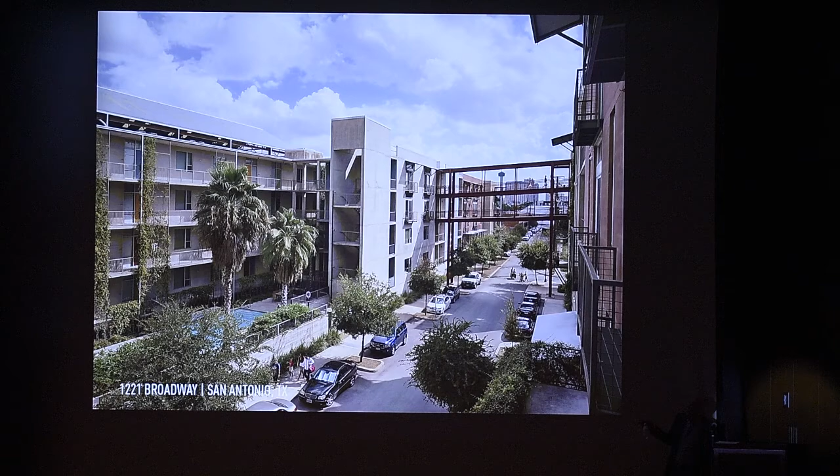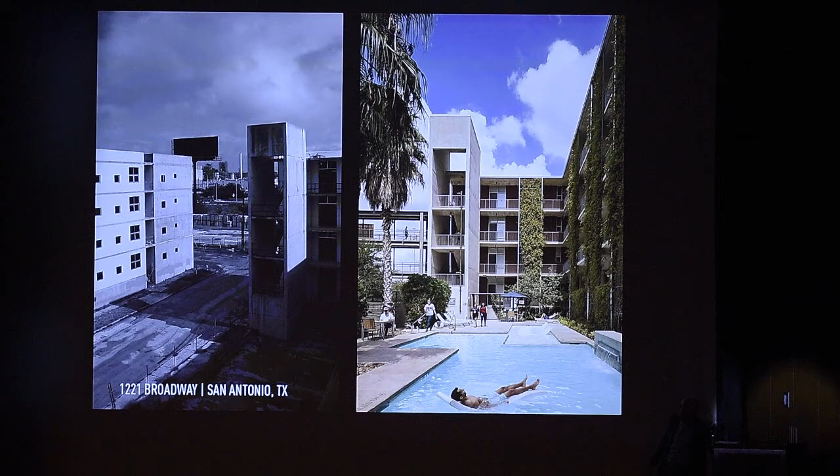It was a shell of a building that had been left for 9 years, and we converted it into 300 apartments, before on the left, and then green screens growing vines up 5 floors. Yes, it can be done. A little bit of drip irrigation and stuff grows all over. And then these are the bridges that glow at night that connect the building across Avenue B.

Right next to this project is the Pearl. On the left above is the before image, and below, but the main thing is it's almost 1.4 million square feet now. 400,000 feet was repurposed, and you can see all the people that are part of it. It's a true mixed-use project.

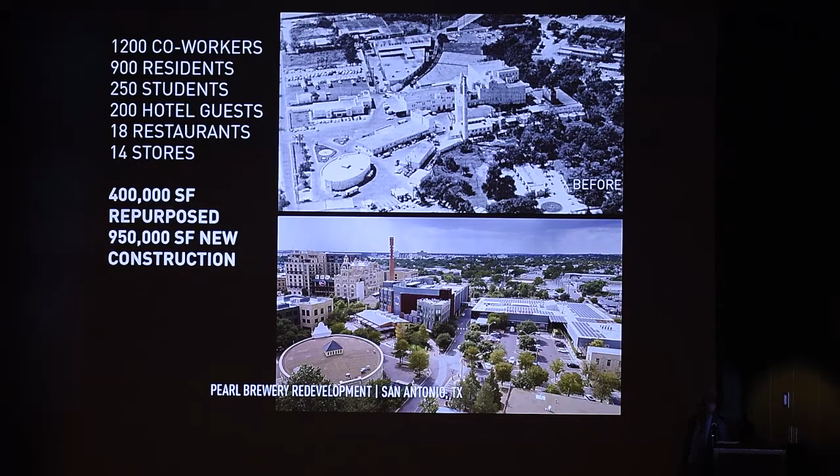Kit Goldsbury of Silver Ventures wanted this to be about culinary arts and make it a gathering place that's extraordinarily important to the culinary arts. So the Culinary Institute of America has a new school there, with over 200 students now. There are 18 restaurants at Pearl.

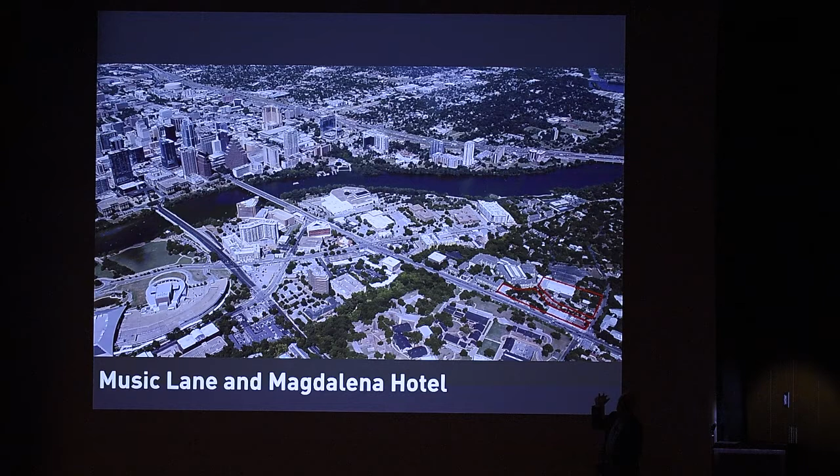Okay, so that's the Austin office. The Austin office is really engaged in urban design. This is South Congress Corridor. Here on the right, many of you will remember the lovely Doc's, it's no longer. So we've taken about 400, 500 linear feet along South Congress down. It's under construction today, and I'm going to run through the idea of making South Congress a new district.

And again, Christy helped us with the Magdalena Hotel. So the St. Cecilia is right here on the lower end. This is the new Magdalena Hotel, which has 110 rooms, 7 condos, 2 restaurants, and the whole Music Lane section on South Congress at the top has those elements noted above.

Most importantly, we managed to shoehorn 498 parking spaces down from Congress Avenue below this block, all below grade, so that there's retail fronting the entire streetscape. There's no garage that impacts South Congress adversely, and we saved the 3 or 4 significant trees on the Music Lane site and then the 4 trees on the Magdalena.

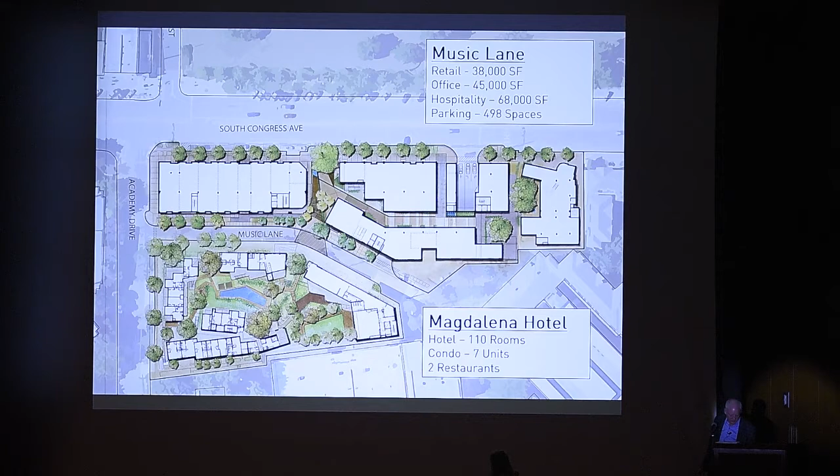Okay, Zeke. Tell me why it's not going. I really am pitiful, I'm such a Luddite. I can barely use a phone.

We're almost done. So this is a view that the office did of Music Lane. We're maxed out at 50 feet—Chris, what's the height? Come on, Chris. 60 feet.

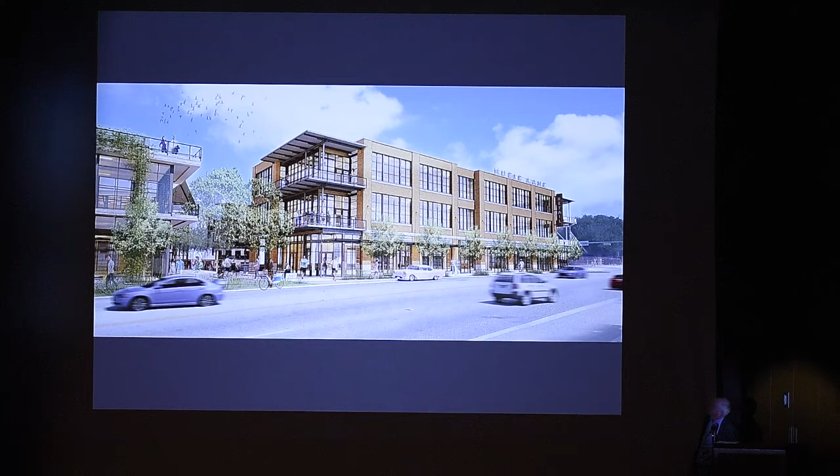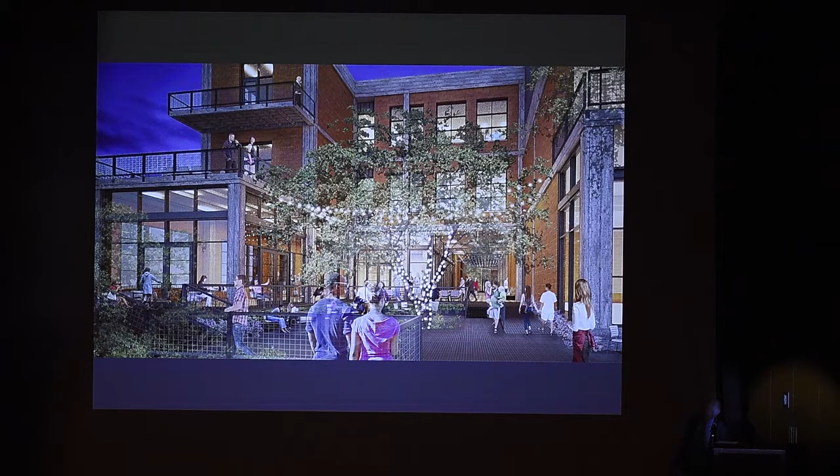And then more views of the Oak Court, outdoor dining, preserving the integrity of the root system with an open porch, and then another view looking kind of towards Travis Heights from School of the Deaf, looking across Congress Avenue.

With this really quirky, I don't know what we're doing here—this is an uncommon objects situation over here. That was our lame effort at Keep Austin Weird, maybe. Or what was it, Chris? I know it's Keep Austin Weird, but what did you call this building? You don't have a nickname for it? The WAC? Well, the WAC, okay. So I know Christy's still lamenting the loss of the crenellated wax museum, and I'm sorry about that too. But we're happy it's gone, and this crazy quilt element is exactly where the wax museum used to be. So it was inspired by some collision of Barragán and Legorreta. I don't know what happened. We'll blame it on Juan.

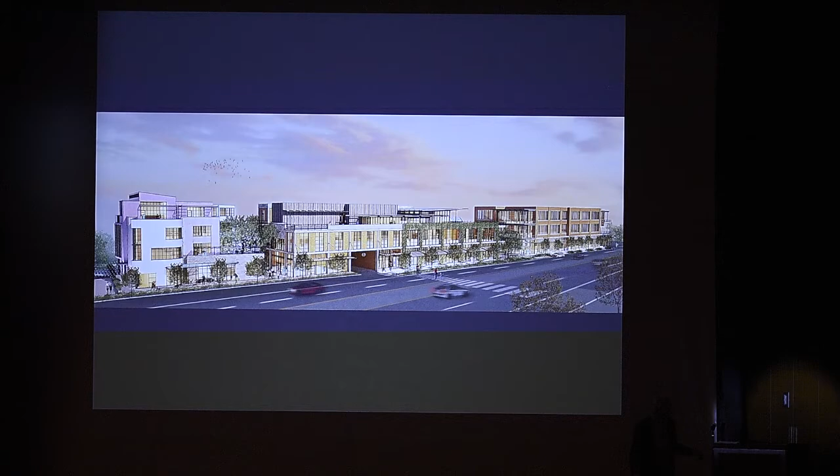That is our tour. Thank you so much for listening.

As long as you're not asking the question. Oh, look at this fleet of foot. I'm told the sudden rush to the doors is not because of me—it's because there's a change in the schedule, and unfortunately students still like going to class. I don't know what that's about. Actually, that's a good thing.

I have a question. With your long career and all the awards you've won, besides the obvious meaning of a contract, is there any general definition your firm has of success that carries on from project to project? Like, what's your definition of success? Wow, that's a good question.